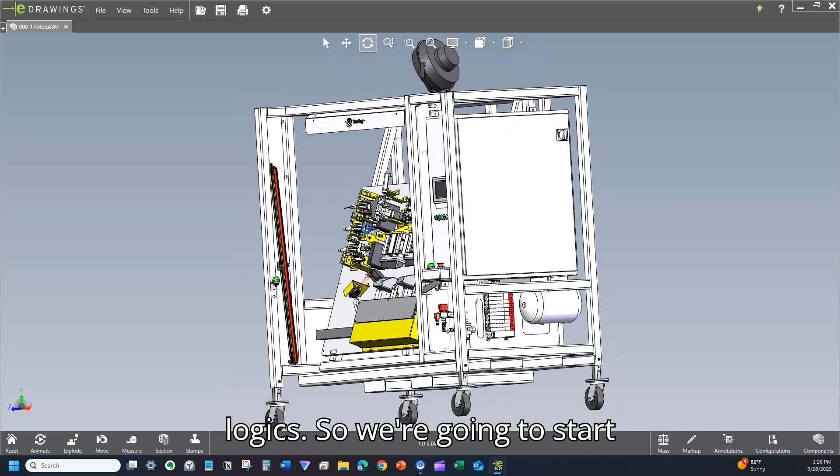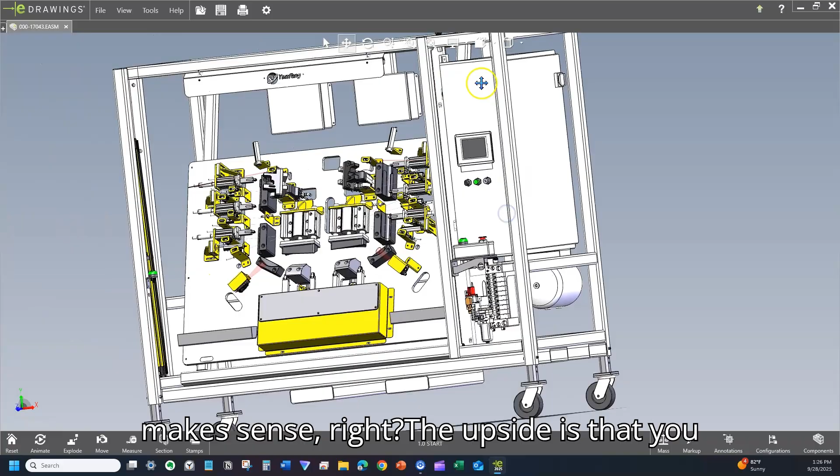So we're going to start with writing PLC programs. If you're working, let's say, on a small machine, maybe a conveyor, or a pump, or a single station, writing code makes sense. You'll build a start button, a stop button, a counter, a timer. That makes sense, right? The upside is that you build a foundation and see how the rungs, tags, and logic all connect.

The downside is that small machines are clean and they're simple. But in the real world, production systems aren't. Writing alone doesn't prepare you for the messy, layered, complex code you'll see in the industry.

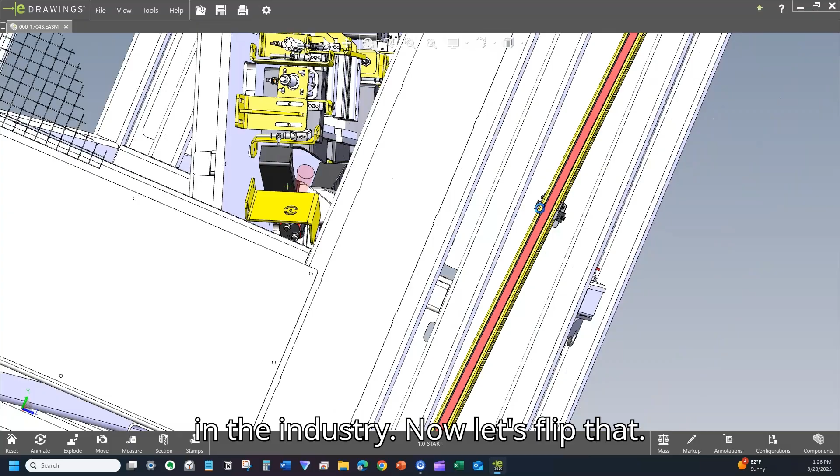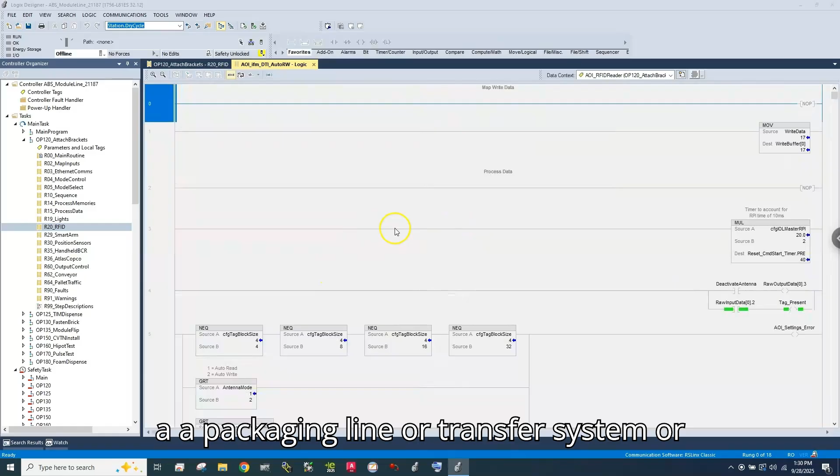Now let's flip that. What if you start by interpreting programs? That is actually what you're going to face on a large, complex system. A packaging line, a transfer system, or a whole cell with robots and conveyors. Now suddenly you're staring at hundreds of rungs, routines, and add-on instructions.

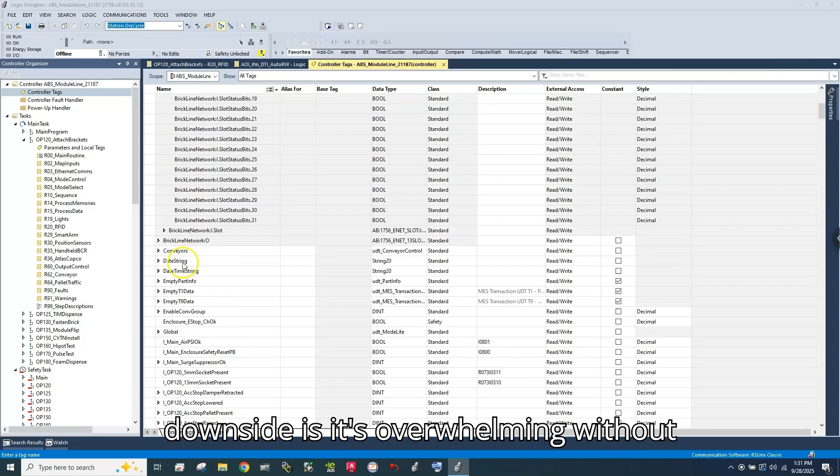The upside is you see how professionals actually build the logic to handle the sequences, faults, and interlocks. The downside is it's overwhelming without some basics, some context, right? So what's the right path? After nearly 4 decades in manufacturing, well over 10 years in industrial automation with projects all over the globe, I've seen this again and again. The fastest growth comes from blending both of them.

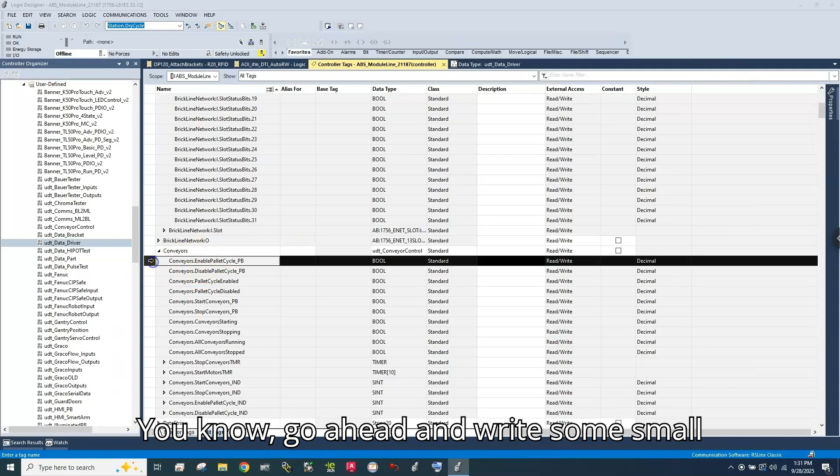Here's the sequence I recommend. Go ahead and write some small programs first to understand the building blocks: timers, counters, start-stop circuits. Then move quickly into interpreting large programs where you can trace tags, follow routines, and see how a production system actually works. Because in the field, no one's going to hand you a blank PLC and say, build me something. They're going to point to a stopped production line and say, figure it out. That's interpretation.

And here's the key. Don't measure your progress by how well you can write a small program. Measure it by how well you can interpret large, complex programs. Because in my opinion, anyone can build a start-stop rung. But the people who succeed, who get hired, get promoted, are the ones who can step into a 500-rung program, find the section they need, and make sense of it.

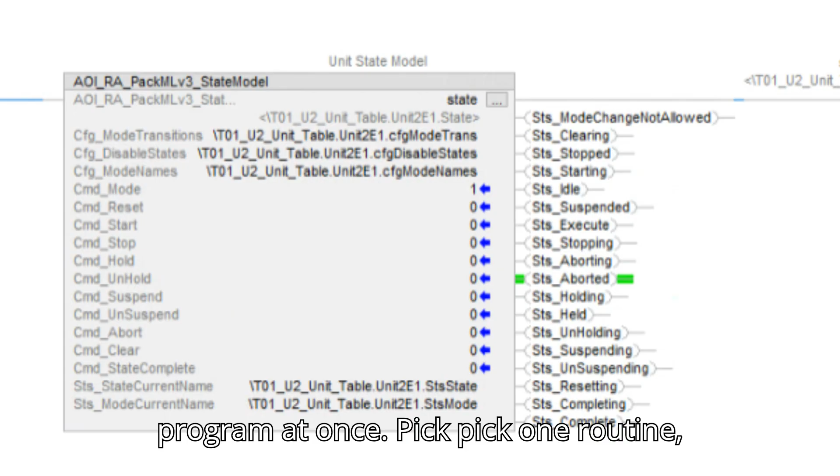So how do you actually learn to interpret a program? I got a few ideas for you. There's a few methods that I've used that really work. Break it into sections. Don't look at the entire program at once. Pick one routine, maybe the auto cycle, maybe the safety circuit, and study it until you understand the flow.

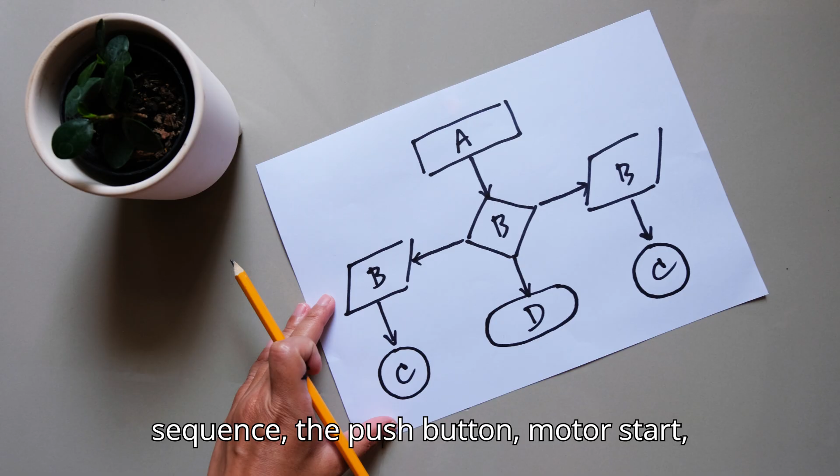Write and test parts of it yourself. Take a small section of the logic, recreate it in your own project, and run it in a simulation. Writing even a piece of it helps you understand why it was built that way. Mind map the logic. Draw out how the inputs lead to the outputs. Sketch the sequence: the push button, motor start, timer, solenoid. Putting it on paper forces you to simplify the complexity.

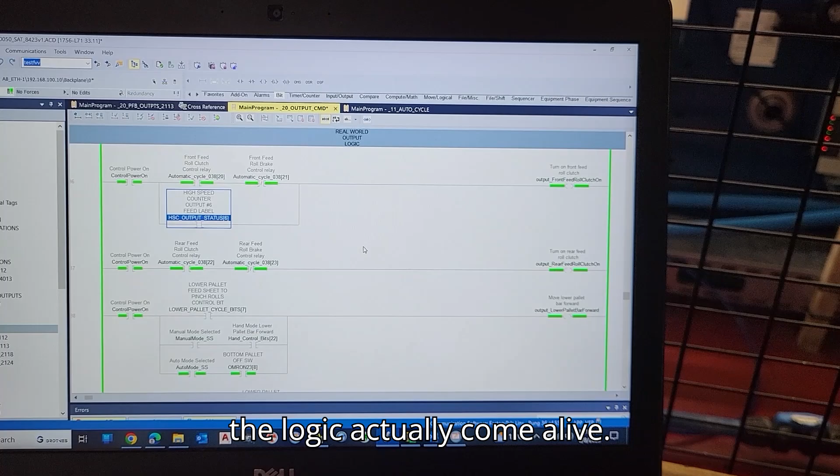Trace the signals live. Go online if you're able to, in Studio 5000 for example, and watch the tags change. Follow them through the program. This gives you real-time feedback that makes the logic actually come alive. Do these consistently, and you'll start seeing patterns. That's when these complex programs stop being intimidating and start becoming readable. You're able to interpret what's actually going on and why it's going on.